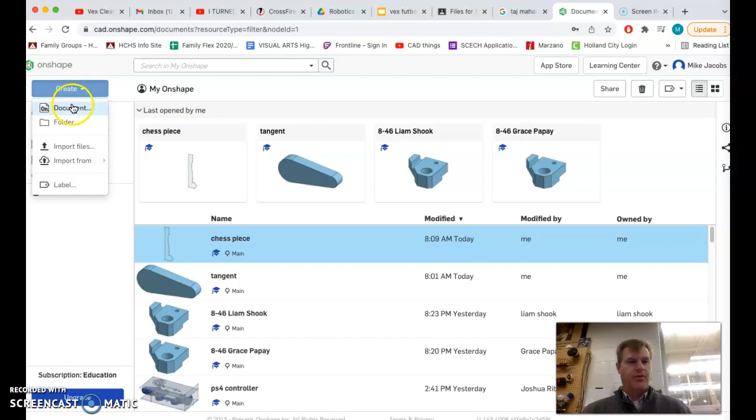I would like to show you three different things that you can do in Onshape. Just some really cool things that add another dimension to what you're making, add some more interest, and let you do some more unique stuff with this. We're going to cover tangent, spline, revolve, and then fillet and chamfer.

All right, so I'm going to call this chess piece 2. Actually, we're going to do tangent first, so I'll call this one tangent.

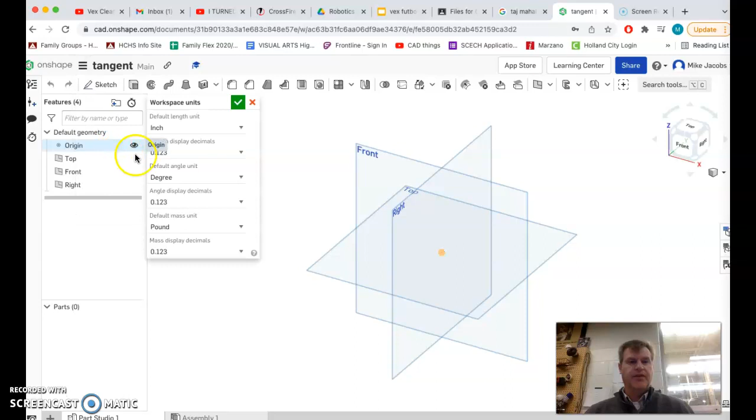Let's see here, start out with the hamburger menu, workspace units. In this case, we are going to go with millimeters. I'm going to do some sketching on this front right there, so I'll hit sketch. Now we've got this guy here, so we know we're in a sketch.

I'm going to do two circles here. I want this first one to be 60 millimeters. I'm going to have my second circle — if you look closely, that yellow line is coming right there, and that's a good thing. I'm going to have this second circle be 30 millimeters wide.

Let's go ahead and make a good dimension between the centers of these two. Let's make it an even 100.

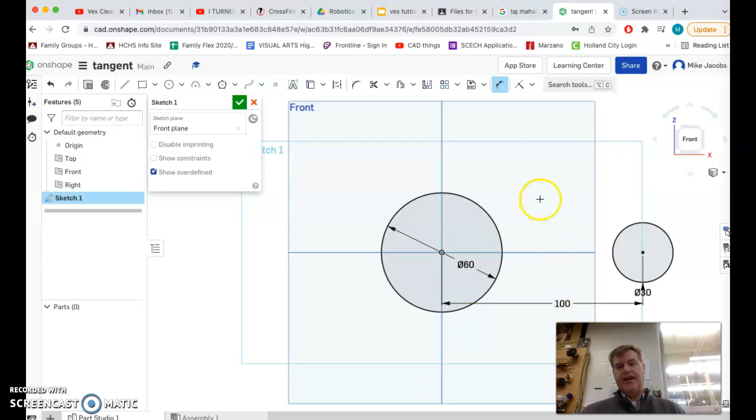Now, tangent. Tangent would be, say I have a shape that's kind of like an oval, but not really an oval. It has this curve of the circle, and it comes out here and here, and everything inside is filled in. It's kind of like an oblong chain link. Say we want to make that — we need tangent to be able to do that. Remember from math class, tangent means touching in only one point.

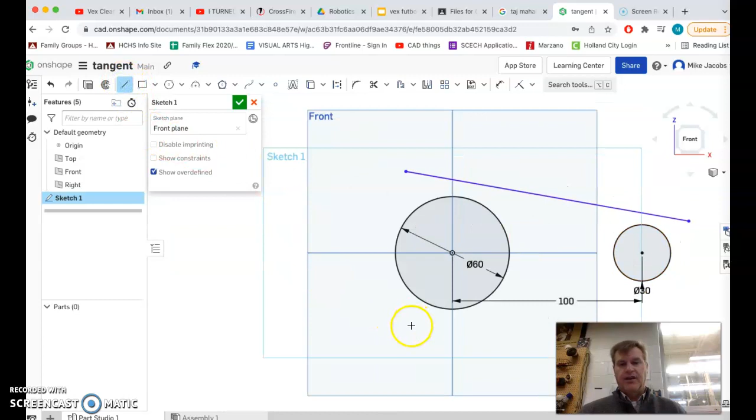I think we're ready to go, I don't think I need anything else. I'm going to draw a line right there — notice I made it way too long, longer than I need it, because we can trim off what we don't need later on. I'm going to do another line right here, going way out. Hit escape to get rid of the little extra bit. Way longer than what we need it.

But I want to make these lines tangent. I want this to touch the circle in only one spot. Up here we have our relationships that we can put in. Right now it's coincident, but there are all these different relationships — you can make two lines absolutely parallel, make circles concentric inside each other, make two things perpendicular with each other. But in this case, we're going to use tangent, so I chose tangent as my relationship.

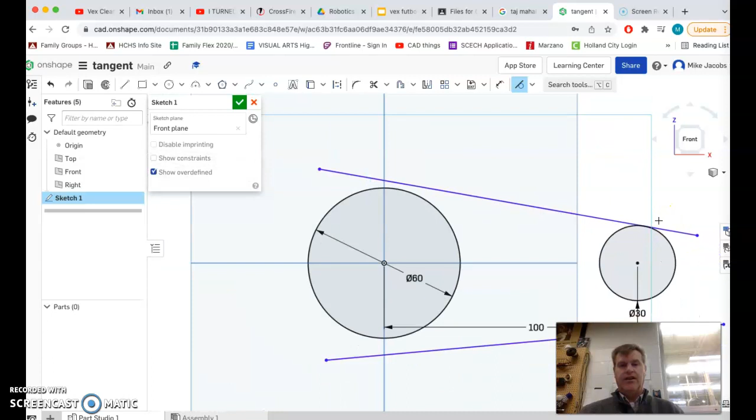Now I'm going to choose this line, and then that line, and now it's touching in only one spot. If you zoomed in, in theory you could zoom in infinitely and you're in only one spot. Same thing back here — notice that tool is blue, so we're doing a tangent relationship. I'm going to choose this guy and that guy right there, and now they're tangent, touching in only one spot.

I'm going to go ahead here, right to there — that is tangent. And go here and there — now that is tangent as well. You can see it just grayed in, which means we just filled this thing in.

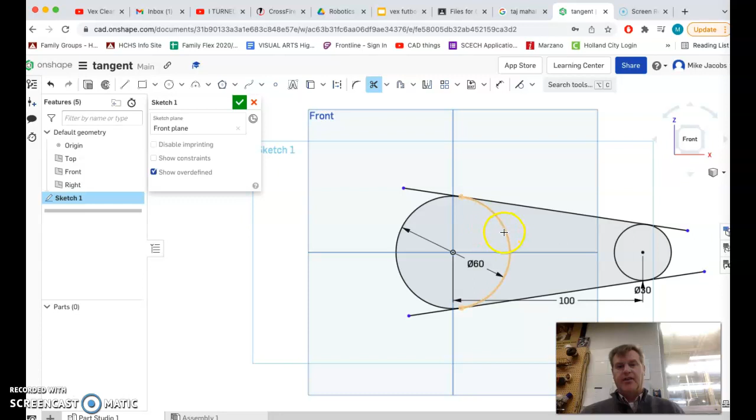Clean it up a little bit. I'm going to use my trim tool right here to get rid of a few of these lines because we made it tangent. You can see it's tangent right there, giving me dots where it's tangent. I'm going to cut that off, cut that off, get rid of that, get rid of that — just all the extras right there.

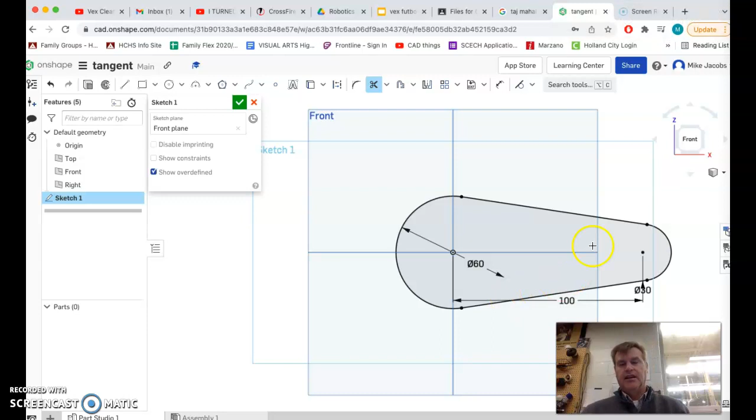So basically we made exactly what we're looking for — almost like a little oblong thing right there. Better charge the laptop. Little oblong thing right there, and we can go ahead now and extrude that thing.

Let's extrude it up — it's saying 25 millimeters. Bam, and we have tangent all set. Tangent is ready to go.

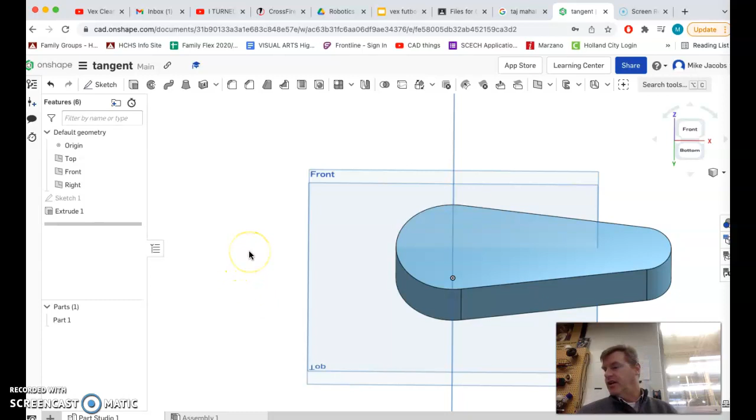All right, so let's see here. Next thing I would like to show you, I'm just going to do a new object for this right here — how to do spline, revolve, and then we'll move into fillet and chamfer. Let's call this guy chess 2.

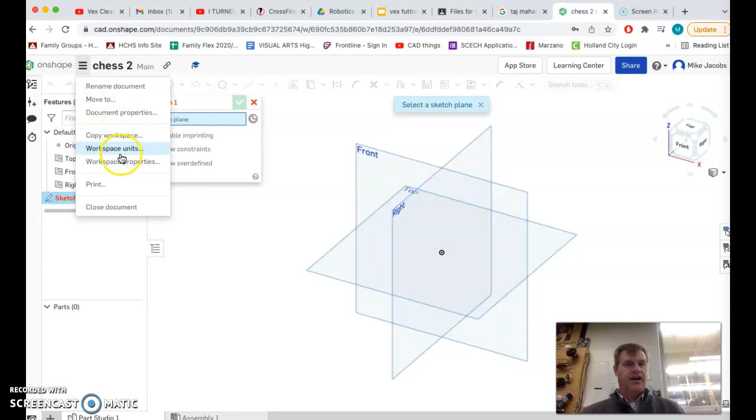All right, cool, we're going to start out with a sketch. Oops, I should do the hamburger first. In this case, I do think I want to do it in inches, so we're going to leave this one in inches. Look straight on at the front, open up a sketch. It's asking for the sketch plane, so I'll just click on front again. Now it says front right there, so now we know we're sketching on the front. I'm going to grab my line tool.

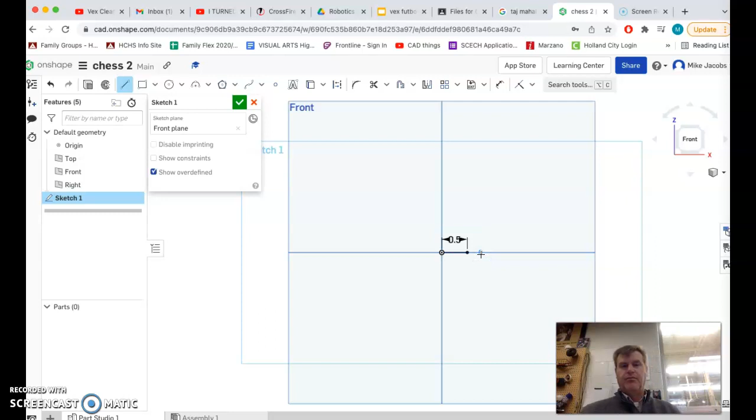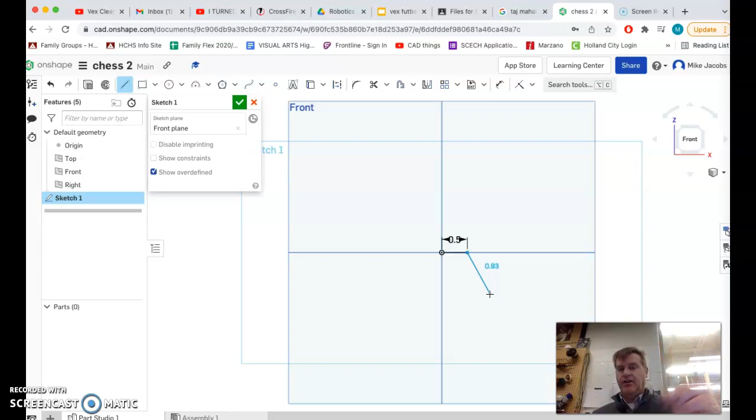I'm going to make my chess piece 0.5 wide. Now, revolve, I should explain this a little bit. I'll use my pencil right here. So revolve is basically, if I have something like an axis, I'm going to draw half of the structure. I'm going to draw the profile of whatever I want to make, and then I'm going to revolve it, spin it around that central axis. That's basically what revolve is. So I'm just setting up what I want.

I'm going to hit escape here. My base, I made it a half inch, but once I revolve this, this is the profile - this is half of my chess piece type thing. Once I spin it around, it's going to be an inch wide. So remember, that will be an inch wide at the base.

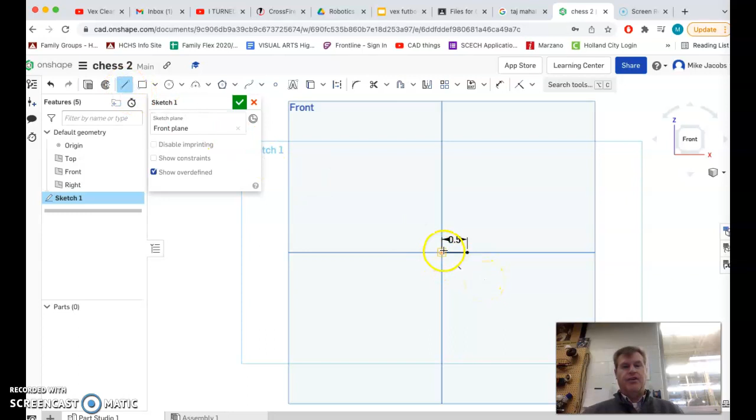I'm going to put my vertical line here. This is going to end up being my axis, and I'm going to spin everything around. Let's just make that 3 inches tall. Actually, let's not, because it's hitting right there - let's just make it 2.5 inches tall, just to make that a little bit easier. I'm going to put another line just coming up here, a little bit. Let's make that also 0.5 inches.

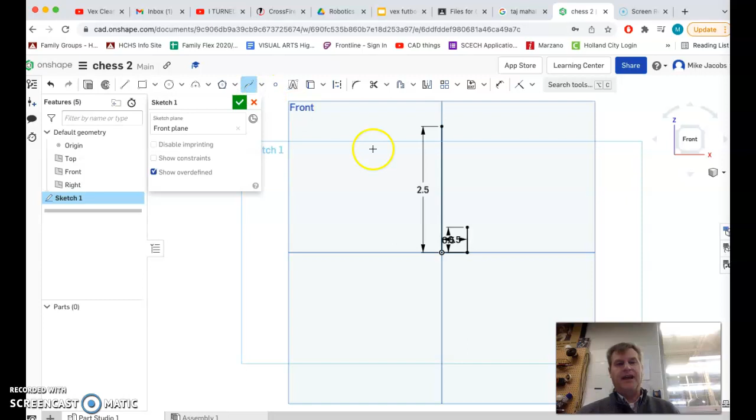Okay, hit escape, boom. All right, now I'm going to use spline. Spline is really cool - I love spline. Spline is basically like a line with simple curves in it. It's a flowing line, think of it like a wire or a pipe cleaner, and wherever you click, that's like putting a pin into it.

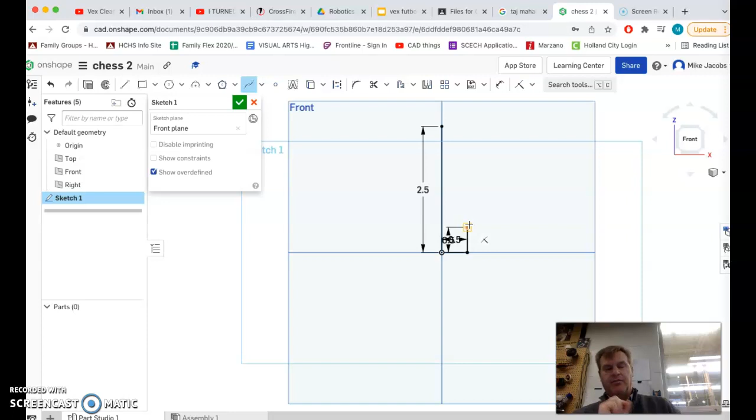So I'm going to go ahead and click here. I'm going to come in a little bit - right about there, looks good. And I clicked, so I just put kind of a pin in it. Now as I come, you can see I can kind of bend this thing, and it makes a nice smooth curve from where I have it coming out.

Okay, I'm going to come right about - no, I don't want to go there. Right about there, okay. Now if I kept going, I can bend it even more, but I don't want to, so I'm just going to hit escape.

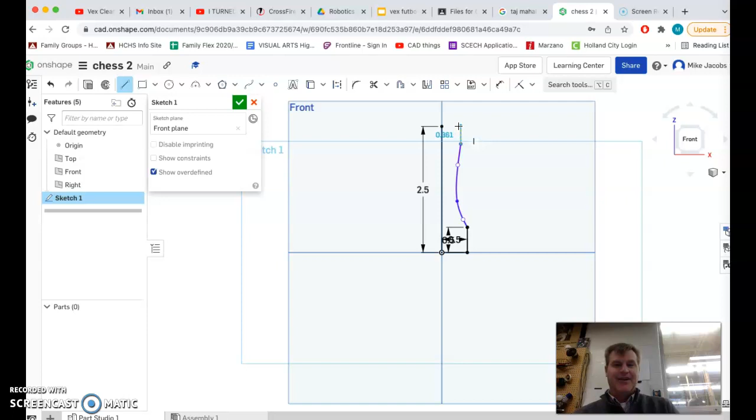I'm going to go straight up from here, and I can see that I'm going straight up - you can see that yellow line there. You can even see it showing when I'm at the same angle, parallel to that other line, but in this case I'm going to go straight up. It's not showing me when I'm even with the top, so I'm just going to go past the top, hit escape, do another line right here going straight in horizontally. Click it, hit escape, and let me zoom in a little bit up here.

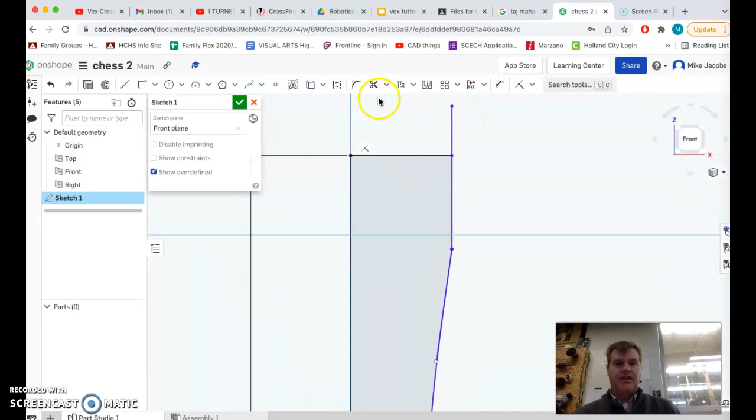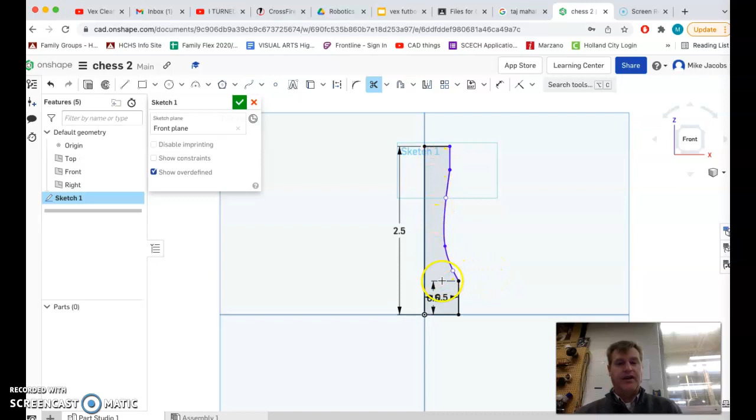We're just going to go ahead and use my trim tool. I'm just going to trim that guy to make it even up there. So I was making this a rook or something like that. All right, now I have my profile fully enclosed, no intersecting lines, fully enclosed - that's exactly what I want. You can see it turned gray in the middle, that tells me we have something fully enclosed.

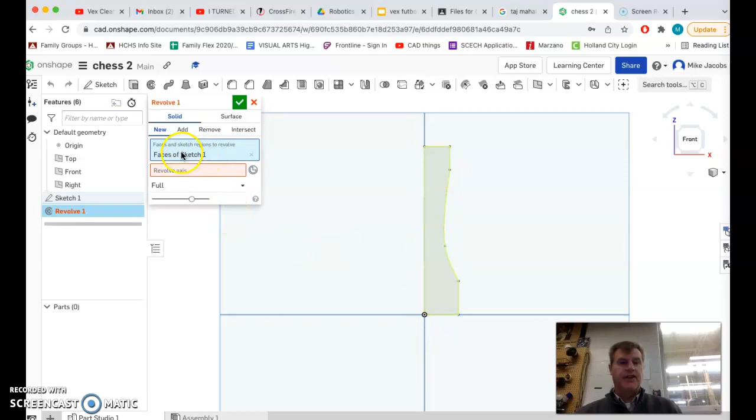All right, now down here I can go to my revolve tool. If I go ahead and click on revolve, it's already guessing, hey, this is what we want to revolve - so that's good. Faces of sketch, we're going to revolve. Down here though, it's red, it's saying revolve axis.

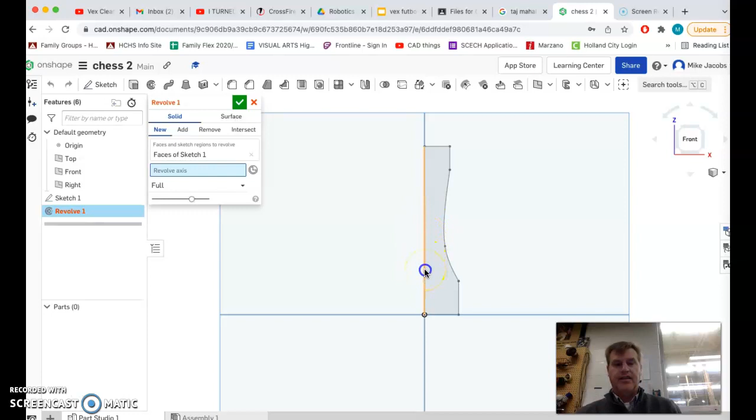It doesn't know what we want to revolve it around, so I clicked on that. Now I'm going to grab this line right here that we made before, that 2.5 incher. I'm going to click on that, and as soon as I click on it, you can see it spun that thing around.

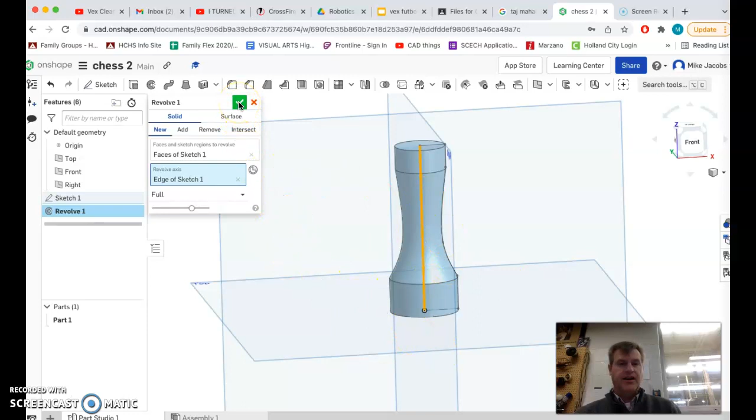It took that profile, revolved it all the way around my axis, and that's pretty good, that's what we are going for. I kind of like that, so I'm going to hit that green check, and we have just revolved it. I'm going to get rid of some of these planes. They're good to know where you are in space, but they kind of get in the way sometimes. So we just went ahead and revolved that thing right there.

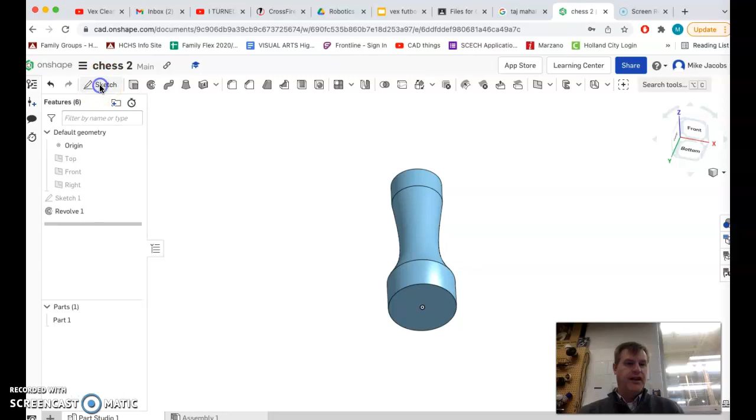Next thing I want to do is show you some fillet type stuff. To set it up, I'm just going to make a larger circle on the bottom. We'll do a sketch right on there. Get a circle, make it this big. All right, don't want to hit that. I want to extrude it.

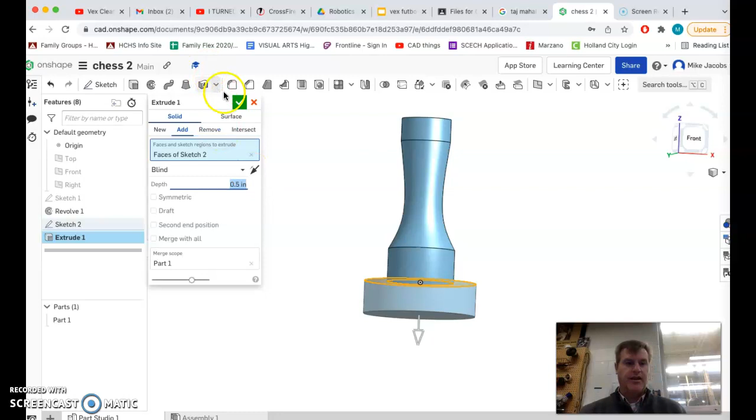1 inch is way too far. Let's go 1/2 inch. Boom, right there, and do a check. So I got a little base on there.

Now, fillets. We can do a couple different fillets, and I want to show you chamfer as well. You can do a fillet on the outside or on the inside of a line. I hit fillet right there. A fillet is basically putting a nice round edge on something, and it doesn't have to be something round. It could be a cube or something like that, you can fillet those edges.

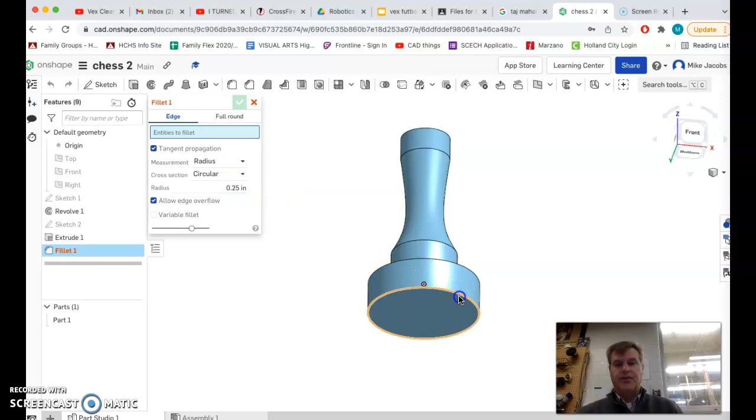Right now it's doing a 0.25 inch, a 1/4 inch fillet. So if I go ahead and hit that, then it rounds it out right there. Okay, kind of don't like it right there, don't want it, that'll make a wobbly base.

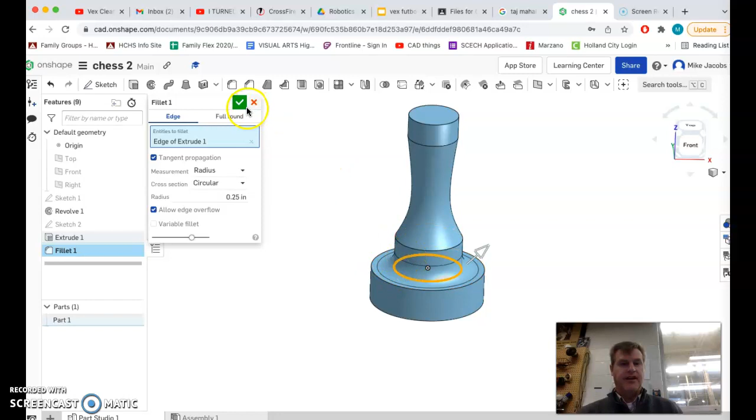So I'm actually going to fillet this inside. Now what it's going to do, it filled it in. It's almost like a welding fillet right there, it just filled that in. That I definitely like. So we just made a nice rounded edge inside of there.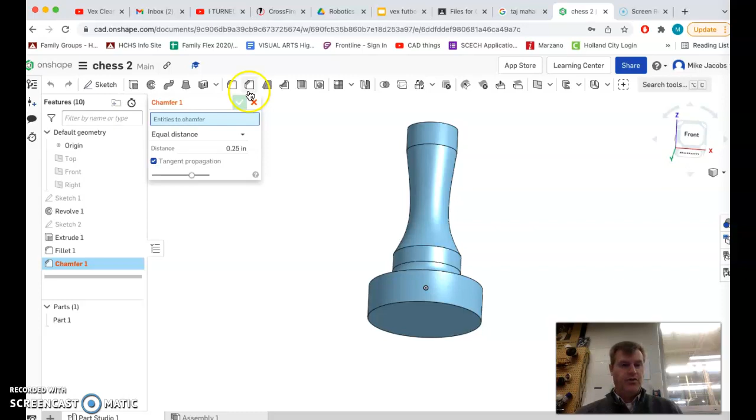Chamfer, I'll just show you chamfer. I don't know if I want to chamfer the bottom, but I'm going to show it to you anyway. Chamfer is right here, it's exactly the same as a fillet. The only difference is it puts it at a 45-degree angle, so instead of a curve, it's going to do a 45-degree angle. You can see that, I don't like it, but I'm going to hit the green check anyway, just because I want you to be able to see what a chamfer is.